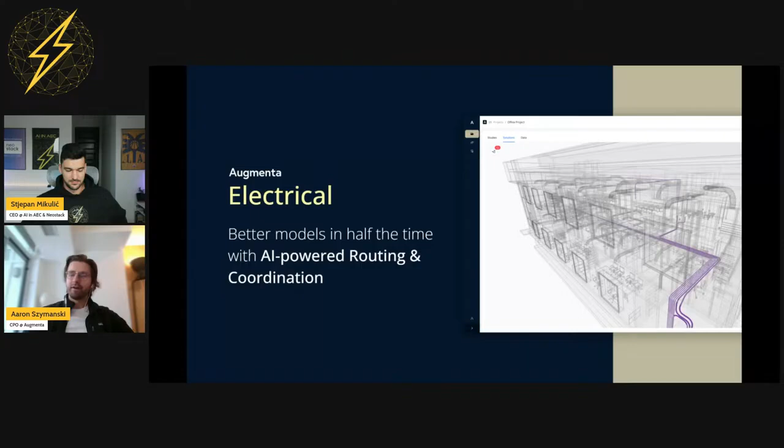All right. So what I'm going to do here is walk everyone through a high-level introduction. I know the goal of these sessions is the demo, so we will focus on the demo. So I'll treat this more as a table of contents. We'll talk about what we'll show you, but we'll go through all that live, and you guys can hop in with any questions you have at any point.

But where we are today as Augmenta, we are focused on electrical. As I suggested previously, our ambition is to automate the design of entire buildings. That is what we're working towards. But right now, we've started off with electrical. Number of reasons for that, but fundamentally our goal today is to help electrical contractors and electrical engineers dramatically accelerate their modeling and coordination process through the use of an AI-driven design system.

So a bit about myself, I'm Aaron Szymanski. I'm the Chief Product Officer and one of the co-founders at Augmenta. We build these systems that automate the design of the core engineered systems. We really care about the things behind the drywall that drive the cost and complexity of construction projects. So your mechanical, electrical, plumbing systems, your structural systems. This is really the hard part of the building design process.

So where we are today is we've got this product that automates the routing, modeling, and coordination of electrical raceway, with a focus on conduit. Most of our users today are electrical contractors, primarily in the United States, and they're using us to get from 0 to 1 very quickly. You've just kicked off a project, you've got your Revit model, there's nothing in there, and you need to get to that first coordination meeting next Friday, and you need that model populated very quickly.

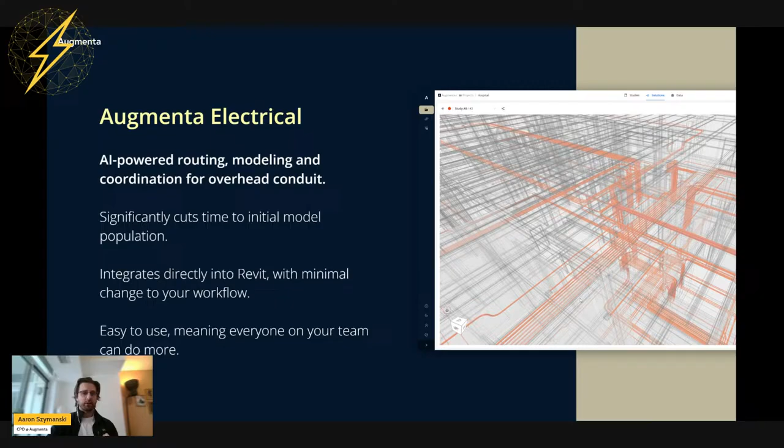Fundamentally, the value is that you can do that in way less time than it would take to do it manually. And that unlocks other benefits as well that we can talk about. So I won't spend a whole lot of time on this because I'll just hop right into a demo.

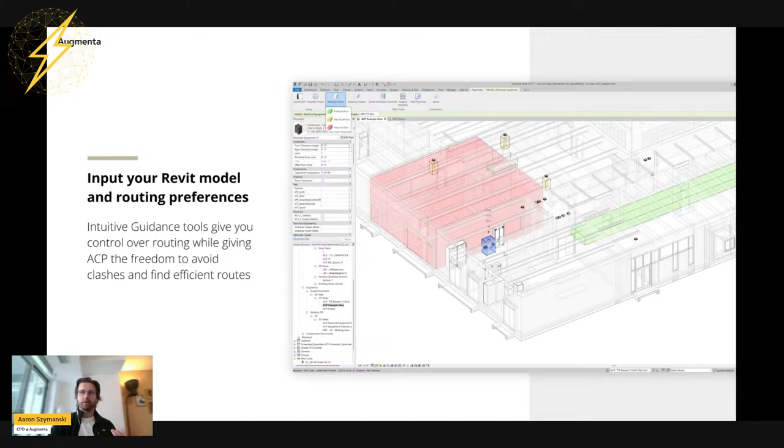But again, just think of this as sort of like a table of contents of the demo. Fundamentally, the way it works is that you define your problem. So you give it a Revit model, you give it your sources and destinations in that model. You can provide your preferences or the context you have around where you can or can't route in that model.

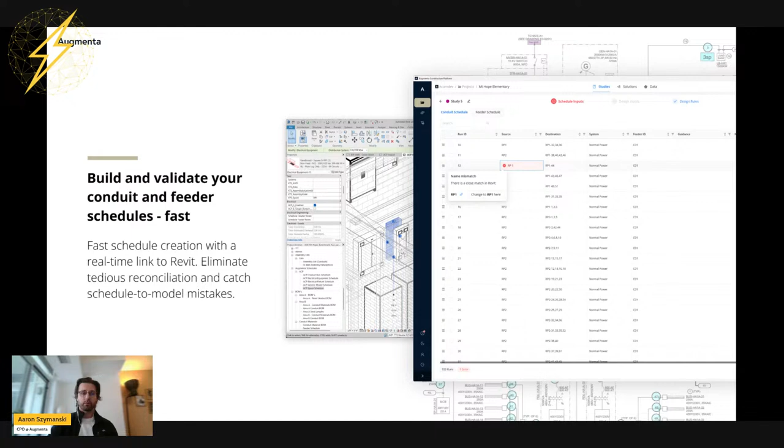You provide a description, a conduit run schedule that describes the runs that you want, or the equipment that you want to connect to your to and froms in a given project. You can specify additional design rules like your elevations, your supporting methods, your clearances. And once you've set all that stuff up, you hit generate and you're kicking off a generation process.

And because you won't really see what's happening behind the scenes in the demo, I do want to spend a little bit more time on this. Fundamentally, what is happening is that our system, which operates in the cloud, is extracting site geometry, the information that it needs about your site, and it's performing a spatial analysis on that site. Essentially, we're trying to look at your site the way a foreman would look at it, where our goal is to produce solutions that are not just generically routed, but are actually constructible.

So we perform a supportability analysis based on the types of supporting methods you specify. So that can be a floor stand, trapeze, wall standoff, and so on. It's going to look at the site, identify the spaces that can be supported with those methods. So for example, it's going to prioritize areas with open slab above over, let's say, directly underneath a duct where there would be some obstacles to get that threaded rod around and get that thing supported.

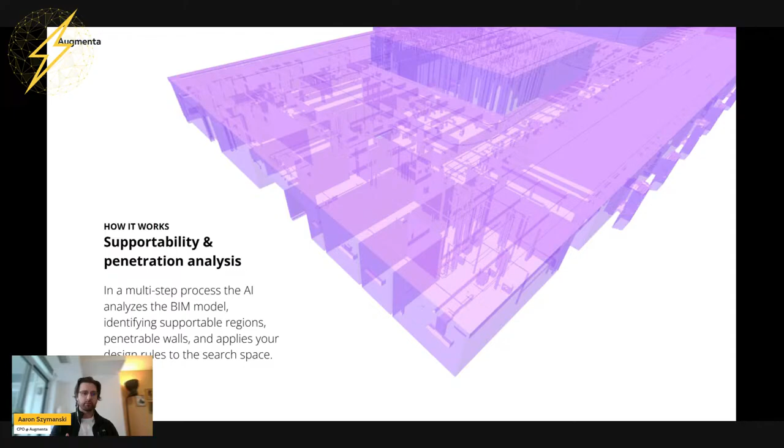We're looking at the penetrability of walls. We have an understanding of the cost of penetrations based on the type of the wall, the amount of conduit that's going to be running through that wall, and so on. So there's a number of different analyses that the system runs. And then within that understanding of the site, it generates a number of designs. It really is single shot, full building routing and coordination. By coordination, I mean it's producing clash-free designs in a single shot.

And it's really solving a number of problems here. It's obviously finding the optimal pathways for every single source and destination, so every run that you need to run in that project. It's figuring out optimal racking strategies. So how do I group these together to minimize the amount and the cost of the supports in a given project? How do I minimize the bends to reduce the difficulty of installation, to reduce my total degree of bend?

It's figuring out the optimal layout within that rack. So how many tiers should it be? It will vary that based on external factors like the space that's available. And again, it's trying to reduce the cost of the supports that would be used on a given design. It's figuring out where to peel off and so on. So it really is solving a number of different levels of problems that BIM and VDC teams have to solve every single day. And that's ultimately what makes this so hard to do for those teams.

Once you've done that, you can review the designs. You can review them in 3D, but you can also review the analysis of those designs, so you can learn something about the performance of these different designs. For example, I can look at any one of these solutions. Here we've got a 3D view, we've got a plot chart, and I can look at the estimated cost, the estimated time to install, the amount of material, the degree of bend. And where this is really useful is that, in just a couple hours, I've just routed an entire hospital floor.

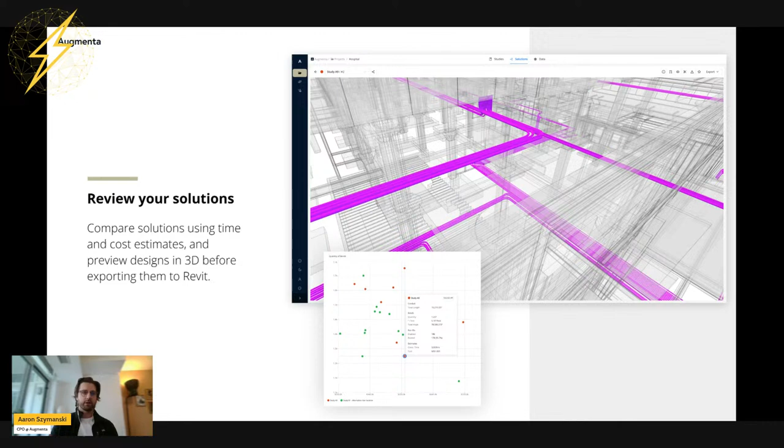So if I'm an electrical engineer, or I'm working on a design build contract, or I'm approaching a value engineering problem, now I can go and compare what would happen if I ran this with aluminum versus copper feeders. There's a size difference in those. There's a cost difference in those. I can just run both in parallel, and now I can get very informed feedback on what is the optimal design for a given project. This is particularly useful for folks working at the earlier stages of the design process.

Once you're happy with the design, you can push it back into Revit, where we've got additional tools for QA and QC to really help you make sense of that design, because you've really just gone from 0 to 1, right? So you started with an empty model. Now you've got hundreds of runs populated. We need to help you make sense of those designs so you know what you're looking at and can verify that everything's routed the way that you want to.

But there's another reason we need this tooling, that is that our designs are not perfect, right? We're very much in the early days of really applying ML to the creation of designs in a complex 3D context. It's much easier to apply to 2D, if we're producing sort of high-level sketches or high-level routes over a floor plan. That's much more of a solved problem than it is in 3D.

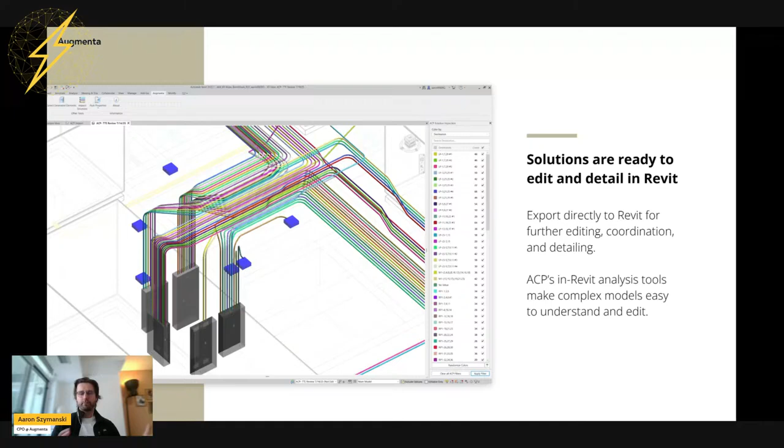And so the result is that today, there are going to be things that you have to fix. There's going to be some soft collisions, extra bends, and so on. I'll show some of those in the demo just to help you characterize those and get a sense of what that looks like in practice.

But ultimately, the way we measure whether this is helping our customers or not is by comparing the time it takes for you to set up. So let's say, create that schedule, get the Revit model set up, the time it takes to generate, which, because it happens in the cloud, is sort of passive time. You can go work on other things while that's happening.

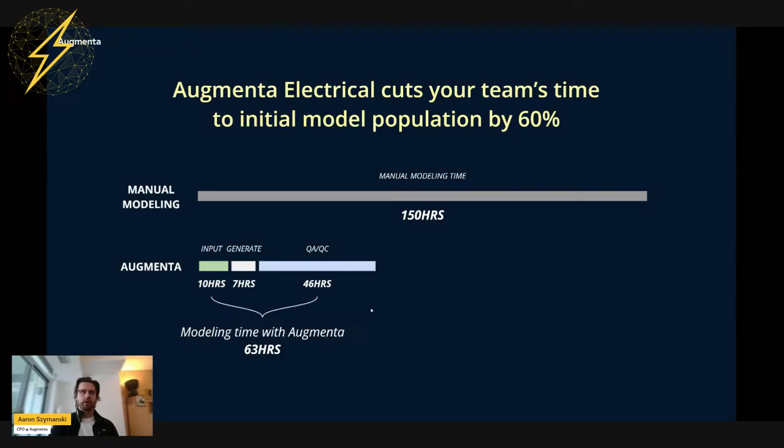And then the time for you to do that review, to make edits, whether because you're seeing issues from a solution quality perspective, or you just simply want to approach that design in a different way because of something you've learned during coordination. So we include all of that. And generally what we're seeing is that teams using this tool are cutting their time by about 60% or so. And that rate of time savings has increased in a very linear fashion over the last several years.

So again, it's like any other ML tool. We're making significant advancements in the performance of the system over time. Our solutions are getting better and better. There's less and less editing required. The setup gets faster and easier, and so on. So even what I'm going to show you today is really just a snapshot.

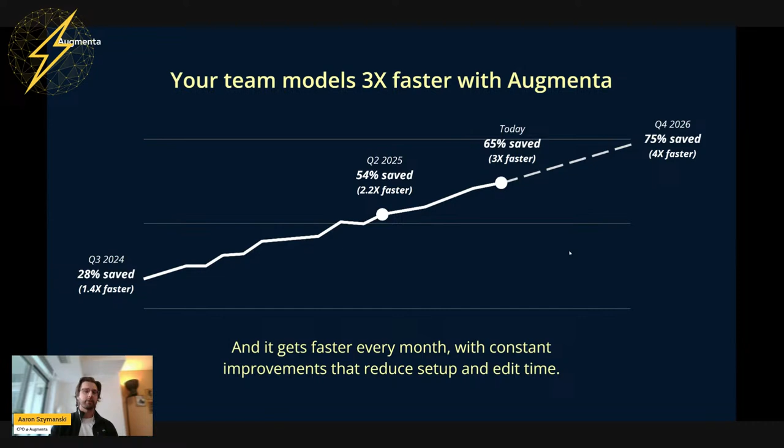If we were to give you this demo even a few months ago, it would be 50% reduction in time. Today it's around 65%, and that's continuing to increase. So we're really targeting to get folks to about a 75% reduction, so about 4x faster by the end of this year, and we're definitely on track to do that.

So just some examples of what that looks like on some more complex projects. This is a hospital. I've hidden all the background geometry, but this was against fully detailed and coordinated mechanical and plumbing backgrounds. Same for a science lab, so very similar level of complexity, but on average, we're able to about cut that in half down to about a third.

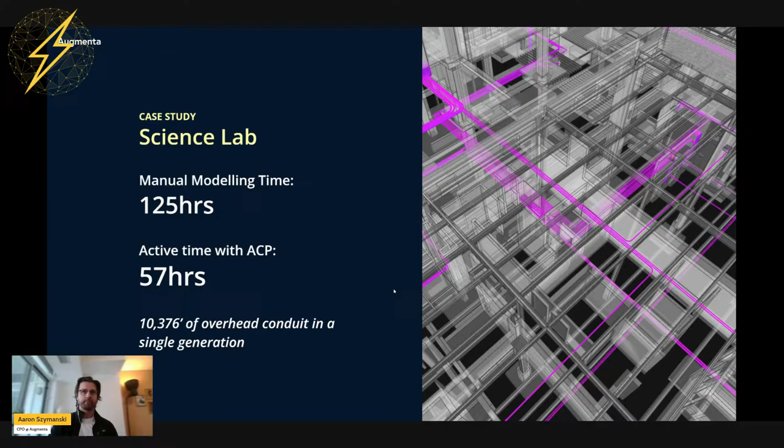So what we're talking about today is electrical, but our goal is to do this not just for electrical, but for mechanical and plumbing as well. And it's not simply about copying the workflow I'm going to demo over to those trades, but it's about being able to simultaneously coordinate those systems in a single shot. So imagine everyone setting their own requirements, their own schedules, their own preferences around where things route, and you hit a button and you're generating a fully coordinated MEP system in a single shot.

Really what we're trying to do is we want to eliminate the coordination meeting. It's going to take us a little bit of time to get there. Obviously, it's a very complex problem to solve, but like I alluded to before, this is very much a solvable problem. And that's really why we built this company, because once we can start to do that, that's when we can really start to take weeks or months off of construction schedules.

Whereas with electrical today, we're helping the electrical contractor a lot. There's certain types of projects, like a data center, where electrical is the critical path. But for us to really bring this benefit to the whole industry, we need to at least be hitting these MEP systems simultaneously, and that's what we're working towards as well.

Let's see. And then we got a question. Can you plan to penetrate steel beams along the neutral axis where the above ceiling space is limited? So you can, and I'll touch on that in a little bit in the demo. By default, the system will not penetrate steel beams unless you give it explicit permission to do so.

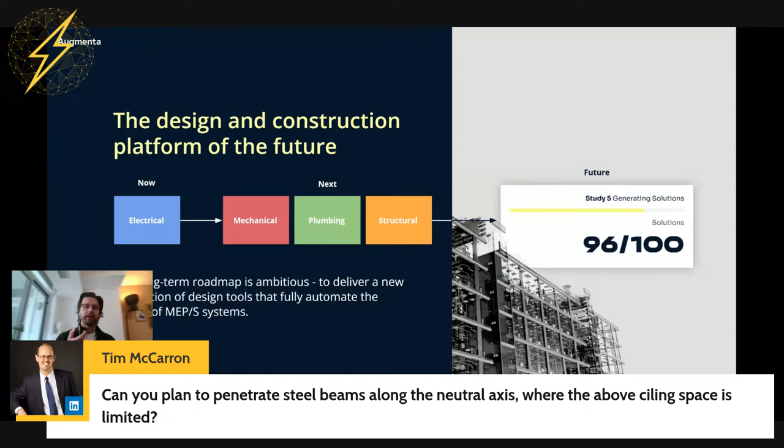The exception would be walls and floors and things like that, where you can set more general rules allowing for penetration. But anything in the structural categories or the mechanical and plumbing categories, it really is up to you to make that explicit indication of where you can and can't penetrate. All right. So that's sort of a high-level overview. Would love to hear any more questions. Otherwise, we can hop into a demo.

Yeah, this was awesome. Thank you for presenting it so well. So now it makes sense how you got started with electrical. I was about to ask you, is it only residential that you're covering? But you showed healthcare, you showed data centers. Are there any limits to what this can do? Is there any building shape that Augmenta can't work with?

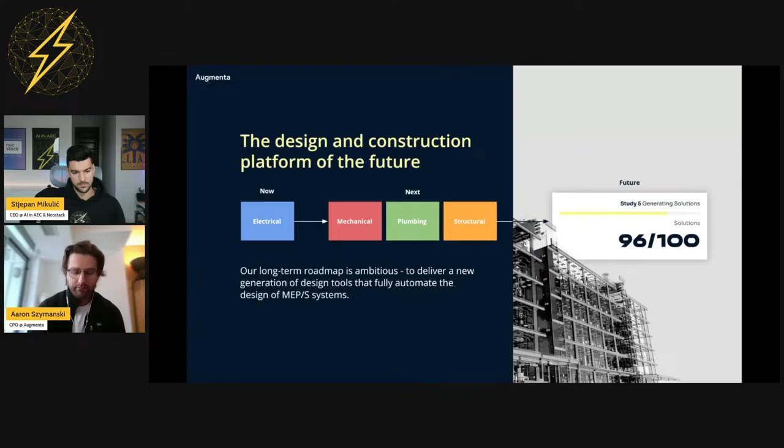We are not currently limited to any building typology. We perform best actually on more complex projects. So we've run multiple data centers, multiple hospitals. We actually have not run, I don't think, any residential projects. I think we actually have one going on now that's a condo building. But we find the biggest application of this is in those more complex projects, because those are the ones that need it, right?

If you really have hundreds of runs that need to be woven through these very tight spaces. Basically what we find is that in that initial setup period of setting up ACP, there's a linear increase in setup time, but a far more aggressive rate of time savings. So on a very small, simple project, like a 10-room clinic, that's a threshold where, given the time it would take to set this up, you might just want to model that yourself. We might save you some time, but you're not going to get that enormous time savings.

Whereas on a data center or a hospital, this is weeks of manual modeling and coordination. That's where you see those really significant time savings. So I would say that our most common project types are data centers. We've got multiple running right now. Hospitals, we've seen a lot of hospitals. That seems to have quieted down a little bit in the last quarter, being taken over by data centers. We've had several manufacturing facilities.

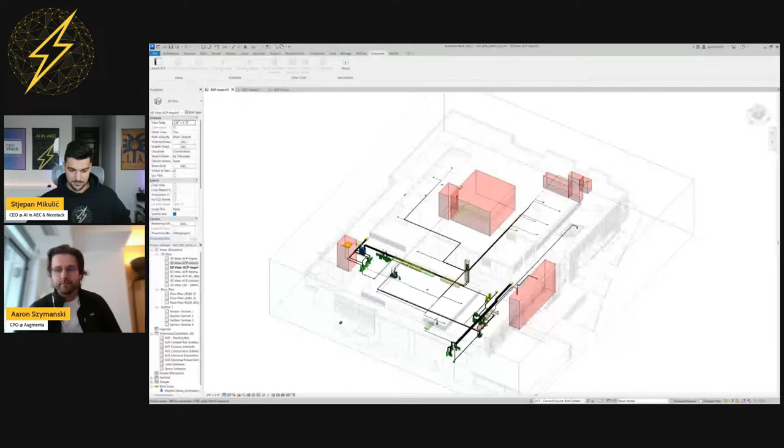All right, great. So there is great demand for that. Yes, we do have plans to move into the European market with greater support for cable tray.

So let's kick off. What we're looking at here is Revit. We all know that. And what I'm going to show you is how you would use ACP to produce what we have on the screen here. So this is a large commercial warehouse / office type building. This is a real project. I won't zoom in too much on the building details, but I will zoom in on the conduit details.

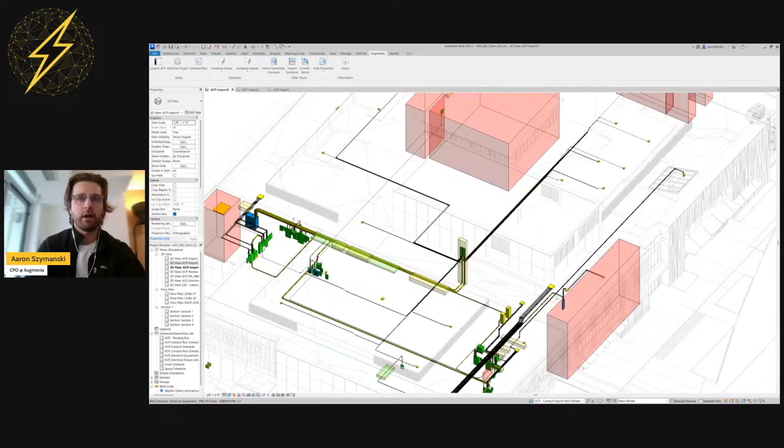So everything we're seeing here, think about how long it would take you and your team to model and coordinate this manually. I won't feed you an answer, but when we ask different customers this, they'll say something in the order of 1 to 2 weeks. And this was entirely generated single shot within ACP in about 40 minutes. There was some setup time to build out the schedule, but the actual generation process was extremely fast. And the output is something that we bring into Revit, and we can zoom in here.

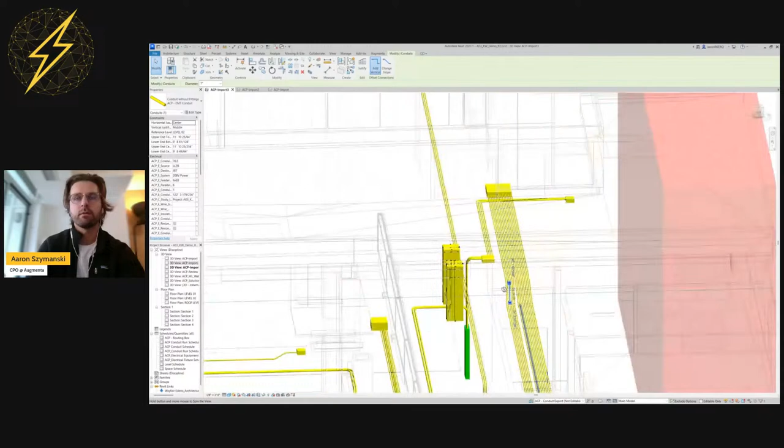You can see that we're connecting to all the equipment. We're laying out those racks. We're coordinating around different obstacles. I'll spend more time looking at the solutions in a little bit, and we'll look at it in ACP. But I just kind of want to start at the end here to show you what type of output is possible. And honestly, by our standards, this is a very simple project.

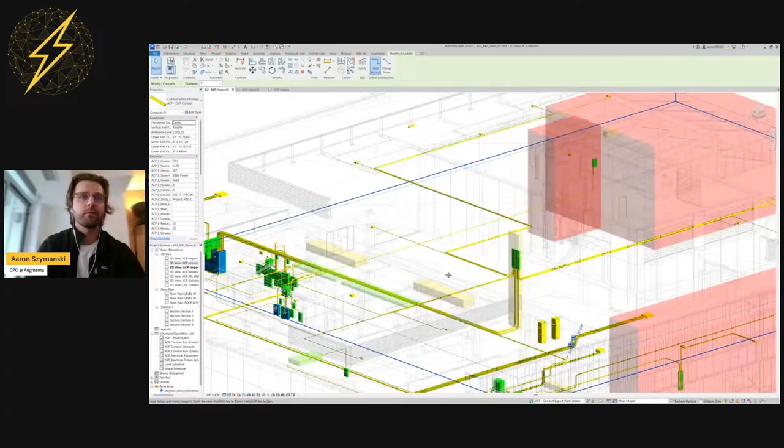So something that you can generate in 30 to 40 minutes is, at this point, fairly easy for us to handle. We're running data centers that can take up to 12 hours to generate. So you're running them overnight. We've run 18 miles of conduit in a single shot overnight in a single generation. So we ran all the feeders and almost all branch for our entire data center in a single shot. So we've managed, especially over the last year, to make a lot of progress in terms of the scale of site that we can handle.

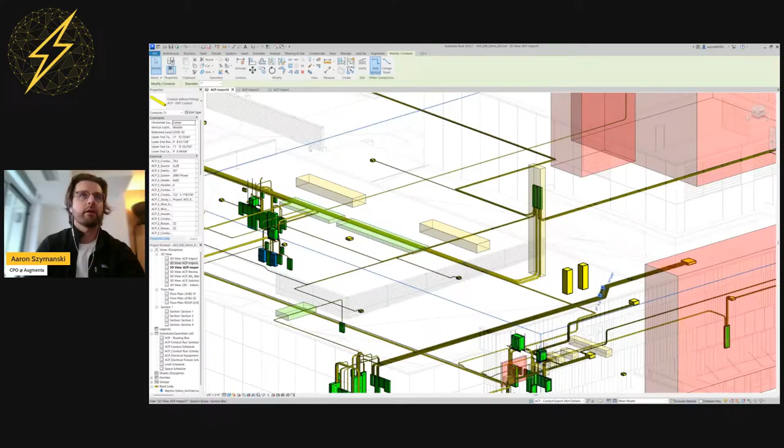But so how do we get here? Well, let's start off with the setup that happens inside Revit. Okay. So what I'll do is I'm going to hop over to the ACP import view. So basically, we've got a special view inside Revit that controls what ACP sees. So by default, ACP, that's the Augmenta Construction Platform, is going to route around, like I mentioned before, solid geometry. Of course, it has special handling for things like walls and certain elements, but generally speaking, it's going to coordinate around anything you want it to coordinate around, and you control that by controlling the visibility of those categories or elements in this view.

So I've got my building open. I've maybe filtered out the things I want or don't want it to care about, but really the most important starting point is that I've got my equipment. So Augmenta does not place equipment for you. This is something that you've placed. It's either coming from the engineer model or it's something that you've placed yourself. And every piece of equipment here, if I open up, let's say, a panel, it's got some kind of a unique identifier. Where is that? Panel name, DH2A, right?

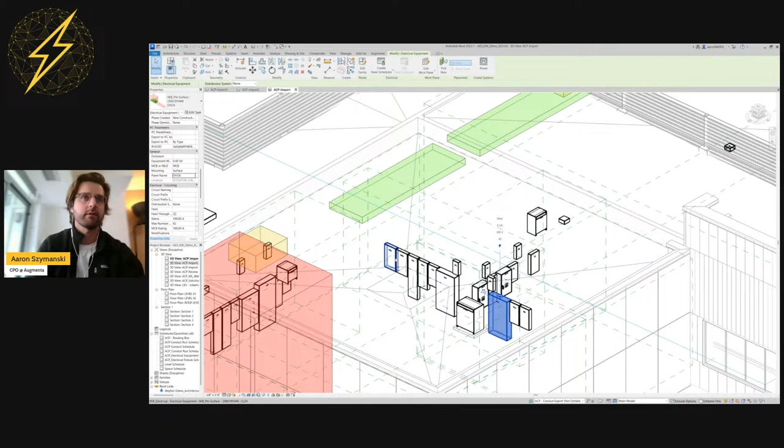So not saying anything particularly revolutionary here. Every piece of equipment, so that's my sources, my destinations, is going to have some kind of a unique name. And I'll show you how we're going to use that in a little bit. So the very first thing we have to do on this project is define our to and froms. So I have gone and I've placed all my equipment. I've placed my junction boxes, my home run boxes. So all the sources and destinations have been placed. I'm going to launch ACP. I actually had it running back here.

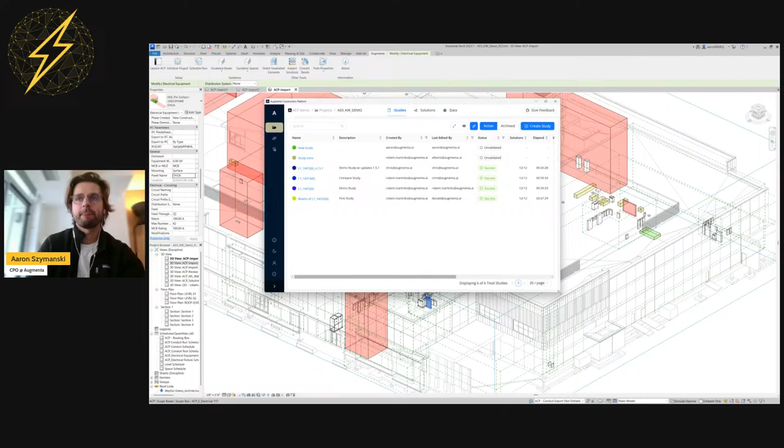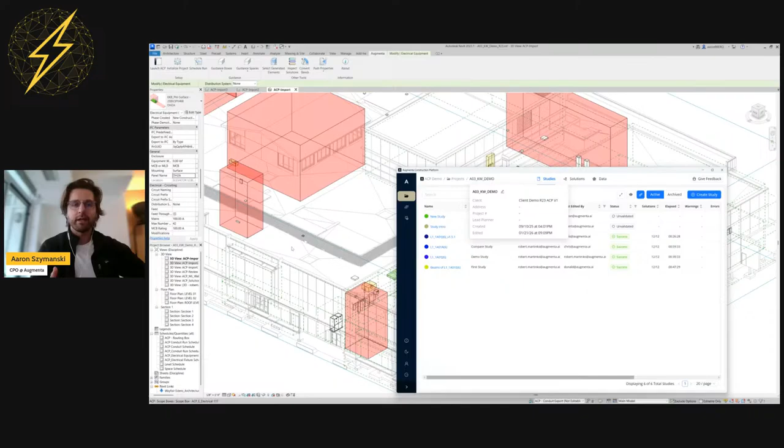Okay. And while we're here, we're looking at ACP. So ACP itself runs in a web view that's embedded inside Revit. So we have this plugin here, and really the goal of this plugin is to read data out of Revit and then later to push a solution back in. We've got some tools here that I'll talk about in a little bit that really help you mark up this model, help you provide some of those preferences, and you can kind of see hints of those colored boxes back here. That's me providing information around where I can, can't, or would prefer that you route. We've got other tools for doing our QA/QC after that I'll talk about.

But really the brains of the system is running in the cloud, and it's accessed through this web app. So right now this is our demo environment, but this would be your company's personal environment. We're inside our projects, and we're looking at this demo project here. And what we see here is a list of studies. So studies are really the key organizing concept inside ACP. And a study is basically a what-if scenario. It's basically saying, with this particular setup of the site, if I were to use this conduit schedule, this site, and hit generate, what type of solutions am I going to get out of that?

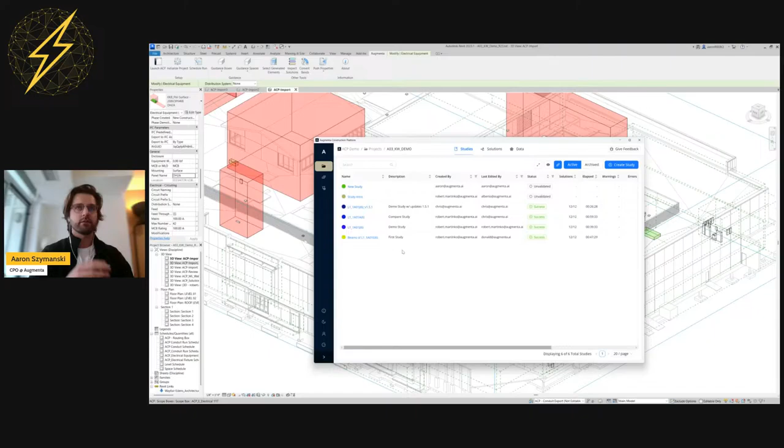So earlier when I talked about doing, for example, copper versus aluminum feeders, or as changes are happening to that project, I can create these new studies, I can generate against them, I can run multiple studies in parallel, and then I can go and actually compare them with each other. I can compare the stats, but I can also overlay them over each other so I can see what is the routing or the space impact of one sort of design decision over another.

So if I create a new study, I just hit create new study. I have sort of a blank one here. And opening this up, the first thing we see is the conduit schedule and feeder schedule. So that's going to answer, Sanjay, your question. This is really one of our primary inputs here.

And what's cool is that I can build out this conduit schedule, which for those maybe less familiar, actually I'll create one and then we can talk about what's in it. So a conduit schedule defines the conduit runs I want to run between a given source and destination. So each one has a source, and I can go in here, and it's actually live linked to Revit. So it's pulling in all of the names that it can find in Revit.

So I'll just pick one randomly here. It's got a destination. I'll pick another one randomly. It's got a system, and systems for us are something that we can later use to target design rules to. And then it's got a feeder ID. And a feeder ID is basically just a reference to a separate schedule, which right now is empty. I'll load one in. That defines the number and the quantity and the size of the parallel run.

So I'm basically saying from ATS2 to CL1B, that belongs to a power system, and I want to run two 2-inch conduits between that. So if I went to the feeder schedule, I can go and build out a new row. I just got to give it an ID. I can say one parallel run, and I can pick a size, and then I can go and reference that here, right? And now I've got this run.

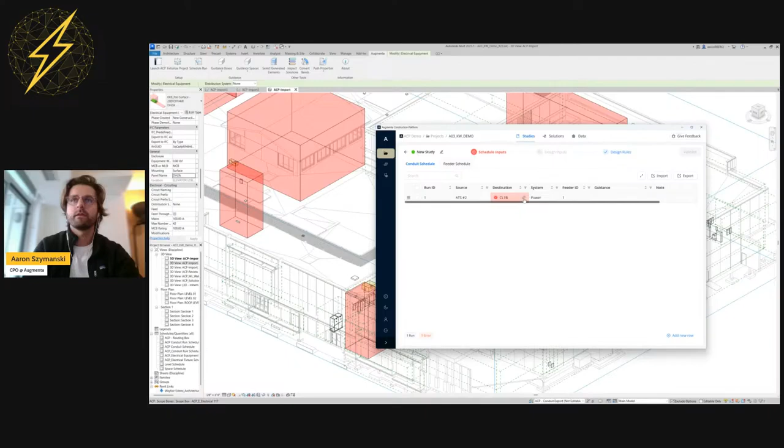All right. So the other thing is, like you just saw, when I load these names in, these are actually live linked to Revit, right? So this ATS number 2, if I click the link button, I can go and actually find that element in Revit. And the reason this is important is that if I change the name of a panel in Revit, that conduit schedule is going to automatically detect that change. It's going to flag that something has changed here. It's going to suggest that there's something with a similar name.

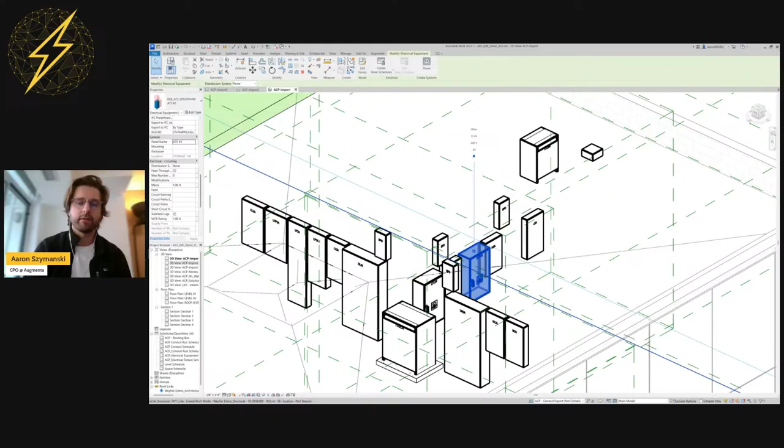So if I went here and let's say I just did ATS2, it's going to say, hey, we couldn't find an ATS2. There's something very close though. Let's go look at what that is. ATS number 2, right? That's what I meant for that to be. I'm going to go ahead and change that here. So this is basically a real-time verification system that makes sure that my schedule is always completely accurate against the model that I have. And this is really important.

If I've got 40 runs, maybe that's something I can manage myself and keep in my head. But again, these complex projects can have hundreds of runs. We all know that things are changing in the background. And also people make mistakes. They make these little changes. Maybe I wrote ATS2 in my Excel-based conduit schedule, but it's ATS #2 in the model, and that's a link that's now broken, right? There's now a mismatch between that data. So we've put a lot of work into building this experience where we have this real-time two-way link between the schedule and the model.

But let's go ahead and clear this out and put in some real data so we can go ahead with the rest of the demo. All right. So the other way we can build out these schedules is, most of the time, you probably have a schedule to start with. Maybe you built it out during estimation. Maybe your planning team has built it out. So we support the import of CSV or Excel formats.

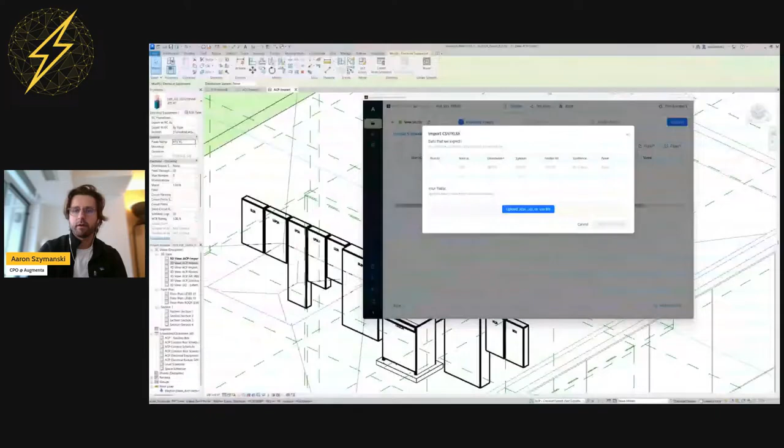So I've got, for example, a schedule here. Let me pull that up, that maybe I pre-built here. It's got a different format than the ACP one, but that's totally fine because we've got this tool here to map those together. So I'll go here and I'll load that in. And basically, I just need to map up. So source, that's my from; destination, that's my to column; system is my system column; feeder, perfect match.

We have this guidance column that I'll talk about in a second, but I don't really have an equivalent guidance column in my conduit schedule that I built in Excel. So I'm going to skip that, and I can just go ahead and import that schedule. So first thing you see is that there's a bunch of errors found here, and that's because we haven't loaded in a feeder schedule. So let's just get that loaded in as well.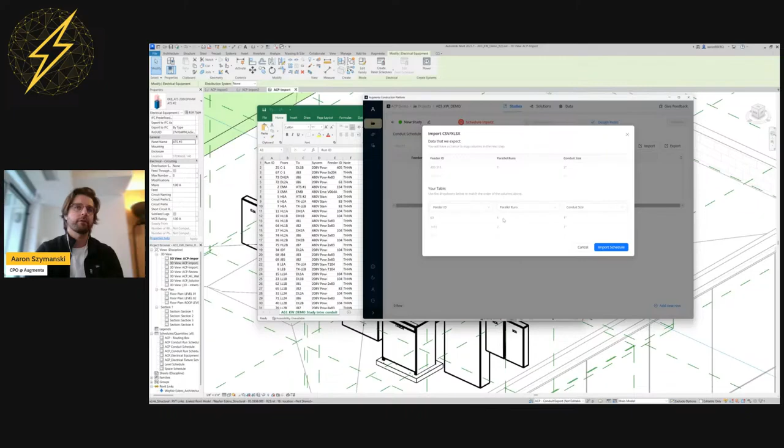And a lot of the time we see that folks are using other systems. They've got an estimation or a PLD workflow that's creating these schedules. Maybe they're exporting them out of Bluebeam, maybe they're creating them in Evolve. So we really don't care where that schedule comes from. We've designed this workflow to work with your process, the data that you already have.

We really try to impose as few process changes as possible. And what this allows you to do, of course, is to work with that. So we've got this mapping workflow that should take in any schedule format you might have. We've loaded in the schedule, and we see an example of what I was talking about before, where we've got this mismatch. Here, someone typed in Excel C-1, but in Revit, it's actually called C1.

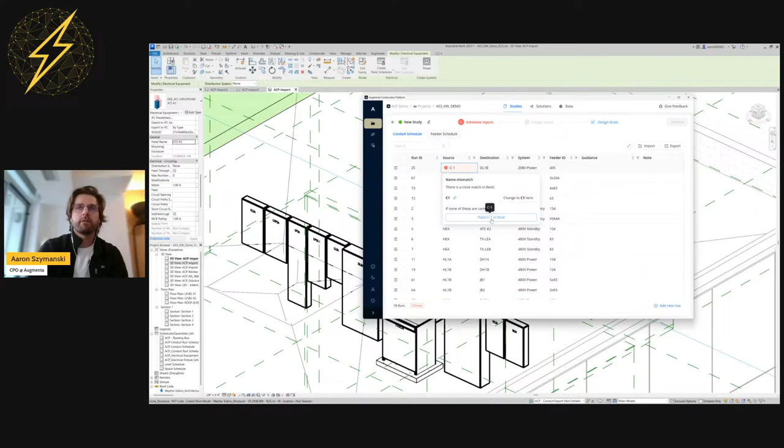We can go and verify that. We can change it. But we might actually say, no, we want the schedule to be the source of truth. There is supposed to be a C-1 that's different than C1. So the other thing we can do is place it in Revit. This is going to open up this other tool where I can go and place devices off of my schedule.

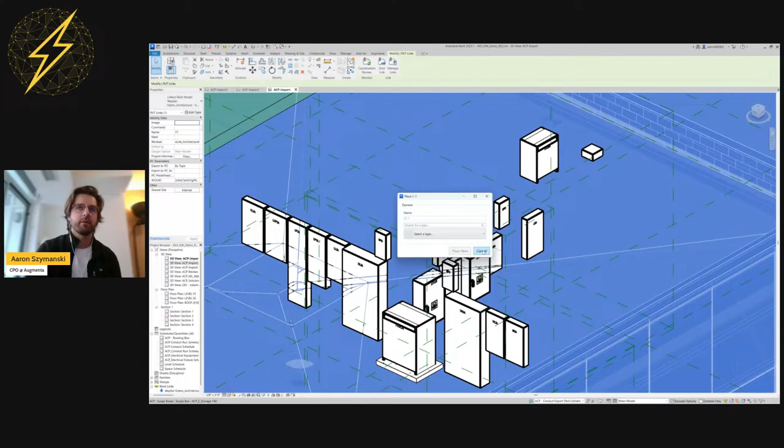Where this is really cool is a workflow where you've got a planning process, your PLD team, this is a little bit more contractor specific. They've planned out their home run boxes. You've got those in a schedule. They're not in the model. I can go and systematically get all that content placed and make sure that I've got a perfect matchup with that model. But for now, we'll just change it here. We'll do that with this one too. Okay, so we've got our schedule all set up here.

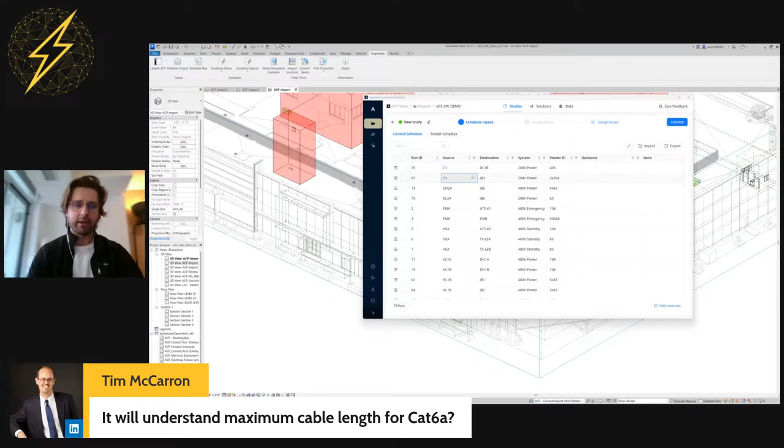Next thing we need to do, and let me just answer a couple of questions that have come up. Tim, you've got a couple here. Will it understand maximum cable length for Cat6a? No, not right now. We don't impose any hard limits based on cable length. We run a global optimization process that is trying to reduce overall length. We are building some analysis tooling that's going to help you identify where you might hit those limits. But really the system is working more towards goals. It doesn't have hard limits around something like angle or length. It's always trying to minimize those as much as it can.

Does it have a level of development that will reduce the model size? I'm going to assume you mean on the export side. There's the level of development on the import side, as in what LOD is this background model. ACP doesn't really care. It just needs the basic geometry. It needs to know where the walls and the floor are. That's technically all that you need. And you just need equipment in there.

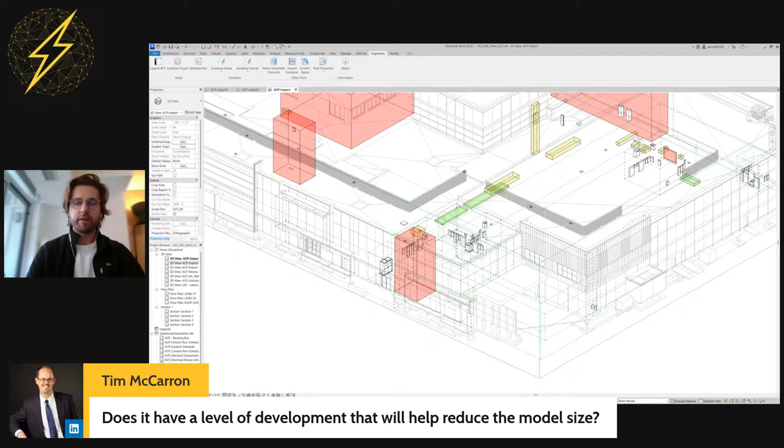On the export side, today we export our designs just using generic Revit system conduit. I'll show you an example of what that looks like. We're not currently placing couplings and supports and things like that. So that's probably the lowest level of development that you'd be interested in working at. And from there, we're trying to make our output as agnostic as possible so that folks can use their existing modeling tools. So if you are using Evolve, we make it very easy to flip over to a tool like that so you can go and detail it yourself.

And would the contractor use the model to do coordination drawings where changes happen during construction? That's a really good question. I would say it depends on how big that change is. A lot of our contractor customers are using this to do that initial population, right? And particularly, we know this is sort of unique to electrical.

They're kind of having to catch up the most compared to the mechanical and plumbing trades, who generally have more to start with. So the electrical contractor, they're getting started. They're often starting with nothing modeled, and they need to get this populated very, very quickly. And I would say that most of the value for them is that: it's getting that initial model populated.

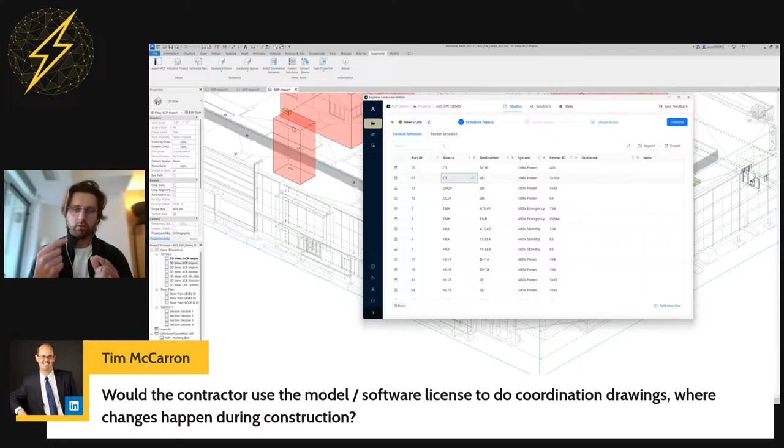From that point on, as the subsequent coordination process occurs, there are going to be changes. If those changes are localized, like I just need to shift something from the left side to the right side of the hallway, we would suggest that you just do that manually. Right now, it really is more of a whole building design tool rather than sort of a localized editor, if that makes sense.

But we have had projects where there were big coordination changes. Like, turns out we can't run down the south side of this at all. We actually have to reroute entirely to the north, where it's effectively a redo. And for that, it's perfect, right? Because again, you can take something that would have taken weeks to do, and now I can flip to this radically different set of pathways very, very quickly.

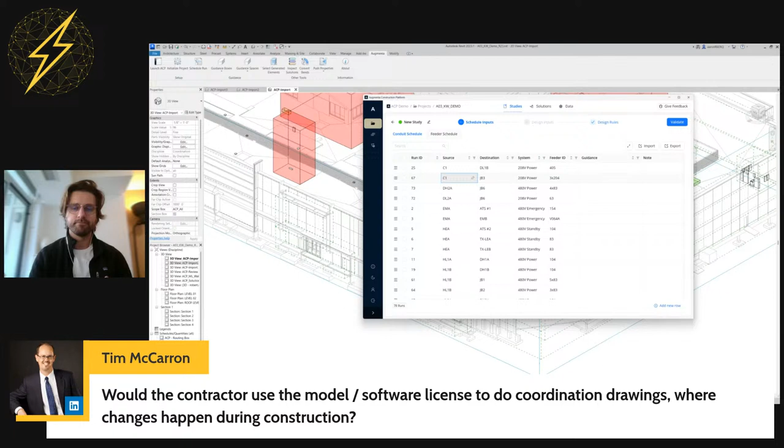So yeah, I guess to answer your question, it really depends on the severity. But really the big way to think of this is it's a global optimization process. It is a little bit more sort of whole building, one shot. So you want to be using it where it makes sense to do so. But yeah, very good questions.

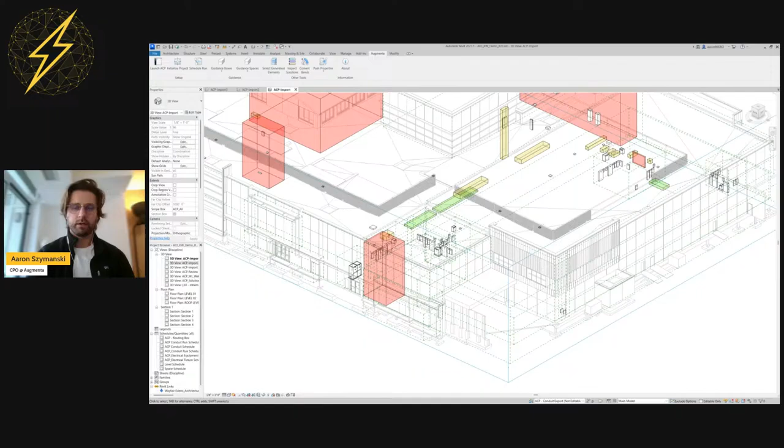All right, so we've got our schedule built out. So now ACP knows what connects to what and what it needs to run between them. The next thing I want to do is give it a little bit more context around where I can or can't route in a project. Using the Evolve, Hari, I'll answer that question in a second. But we don't have that issue, is the short answer.

So the way I do this is, okay, I've got this project. There's things that I know about it that I need to tell ACP, right? So ACP generally works with a fair bit of design freedom. I could take what I've shown you so far, equipment, conduit schedule, and just hit go, and it's going to route that entire building already with no additional guidance. But quite often I have some idea in mind of where I want things to go, and we can specify that with these guidance tools. We've got two types, but they kind of work the same.

We've got guidance boxes. The first is a preferred routing box, where this is basically a way for me to specify my preference, right? It's effectively, I'm sketching out a magnet that draws the routes to that pathway. I'm sketching out may route boxes. Those are the ways I would indicate those penetrations. So again, I want to indicate where I can penetrate through the beam, and so on.

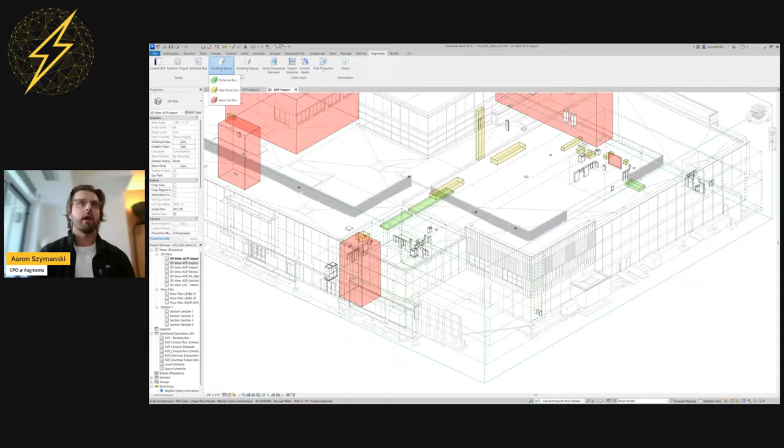Or sorry, the keep out boxes are sort of the inverse of that, right? So a keep out is a way for me to specify where I don't want you to go. So keep out is a way for me to say, look, in this mechanical room, you cannot run any racks through here, but you're still allowed to hit equipment inside that space. And a guidance space is basically the same behaviors, except I can apply them to spaces instead of drawing these boxes manually. But that's really what we see here, right?

So we've got keep outs. Maybe we blocked out some shafts or some areas that we don't want any racks running through. We have different routing boxes. So we've got a combination of may route and force route boxes, which are those preferred routing boxes. And this is a way for me to provide this high level guidance to the system.

Related to that is, if I want to get really precise, I can actually go and assign some of these runs to those preferred routing boxes. And what this will do is force that run to pass through that box. So I can set up these boxes essentially as waypoints for those runs to pass through. Okay.

So now I've gone and specified my to and froms, where I want things to go, where I don't want things to go. And really at this point, the next step is just to get that data up into ACP. So I won't show this live just because it takes a couple of minutes, but this is really kind of the only syncing that happens, to answer Hari's question, where I would need to upload the geometry from that site over to Augmenta. This process generally takes a couple minutes, but it is one shot.

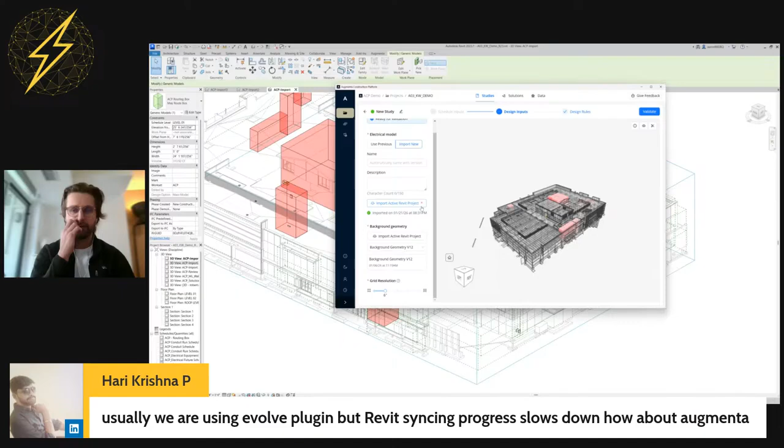Once you actually hit that generate button and you start generating the solutions, it is running in the background, it's running in the cloud, so it's not affecting Revit whatsoever. So generally, this is something where you'll set it up in the morning, you hit generate, it's going to run in the cloud. We're not touching Revit at that point. You can go and continue working after that. At the end, you're just pushing a solution back into Revit. That export process takes a couple minutes, but there's no background syncing that happens.

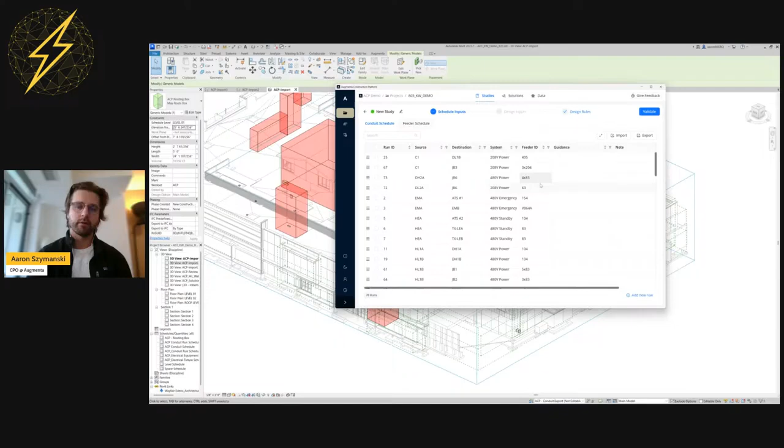There is that sort of syncing or live connection that happens in the conduit schedule, but it's extremely light. We've put a lot of work into optimizing it, so we've never seen or heard about our customers having any kind of performance issues as a result of that running. And again, it's only running when you have that view open as well. So we're not live updating data in your model as you're working through it. So in this tab here, I've uploaded the electrical model and the background geometry.

And then the last pane here is my design rules. I won't go through all of them; I'll touch on some at a higher level than others. The first is supports. Essentially, even though we're not yet placing the supports themselves, we are very much considering the types of supporting methods that you specify when we're generating these routes. So in a separate part of the application, I can set up my support specifications. It's literally just a prioritized list of trapeze, floor stand, wall standoff, and so on. Again, I can scope that down to different parts of the site.

So I can say I've got, let's say, a manufacturing facility. In this area floor stands are acceptable. Everywhere else is just overhead trapeze in all the office areas. We have different clearances from different elements, so we can specify clearances from walls, railings, and things like that. We have our conduit spacing, so this is edge to edge spacing, horizontally and vertically.

And then we have our elevations. This is probably one of the most important types of rules that you're going to set. So we have a lower clearance: what's the minimum height that this can run at? What's the maximum height that this can run at? That's my upper clearance. And then within that range, which might still be fairly big, what's my preferred height? So we can set this preferred elevation in that allowable range. ACP can still enter and exit this range, of course, to actually connect to equipment.

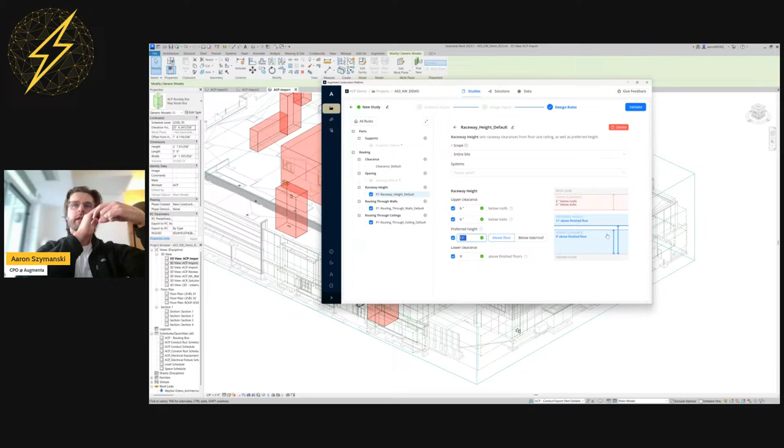But generally, I want to run above the ceiling. This is the allowable range above the ceiling, and I want to try and stay below duct. So my preferred height is below where the duct gets run. Within that, we are working on a very similar concept to that preferred routing box. It's basically a magnet, so the system will try to run at that height. It can still deviate where it needs to: say I've got a clean shot here at 11 feet above finished floor and there's something in the way, I can offset down around it and then get back up to that elevation.

Other than that, we've got some general rules around routing through walls. This just gives us permission to route through walls. We identify which walls are interior and exterior so that we're not punching in and exiting the outside of the building. And then same for routing through ceilings. Generally, you want to leave this on because you want to be able to drop down and hit equipment if it happens to be placed below a ceiling.

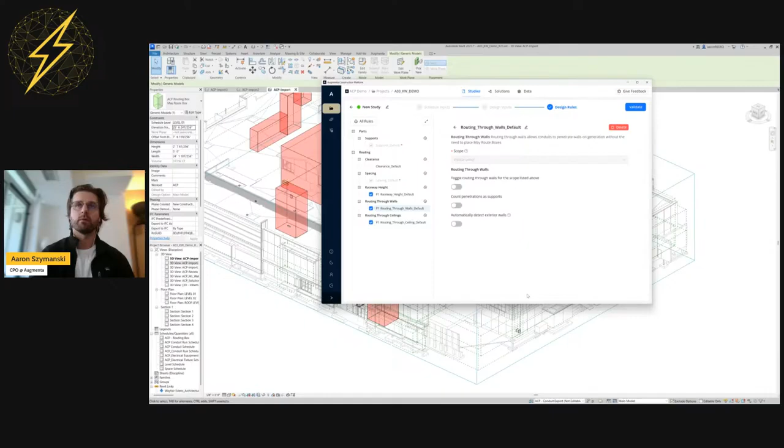All right. So at this point, and I will pause to answer questions in just a second, this is the setup. This is everything that I need to do to define a problem for this system to go and solve. At this point, I would just hit validate, generate, and it will kick off that generation process. As it does so, like I mentioned before, it's just running in the cloud. It's not affecting my Revit instance, and I'm free to work on other things. All right. So let's see, questions. Okay, so Hari, I think I touched on your question.

Marie: looks super useful regardless of how it works, but seems more like a mathematical optimization than AI. If not, what is the AI part? So it's a really good question. Underneath the hood, we're using a combination of more, let's say, traditional mathematical optimization and true data-driven machine learning. So this is not an entirely data-driven machine learning system.

The reason for that is that, particularly within the 3D context, we are not able today with present-day technologies to arrive at the level of accuracy that is sufficient, particularly for contractor applications, where they need something they can bring into actual coordination meetings and get actual design sign-off on. So we knew that going in. So our system is a hybrid.

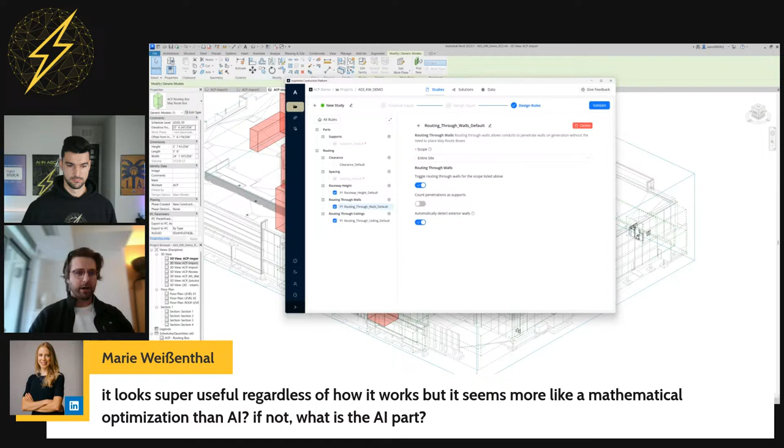I won't quite go into the details of where we use different things, but essentially we've got a solution generation pipeline. Some parts of that pipeline are driven by machine learning. You can think of this as a higher-order coordinator that identifies the high-level strategy for routing, whereas the actual details of how that route is executed are done using more traditional mathematical optimization and computational geometry approaches, so that we can get to the consistency and accuracy that we need for this application.

Okay, and then Tim: areas below rainwater leaders for the roof drainage. Tim, I think I might need a bit more context on that question.

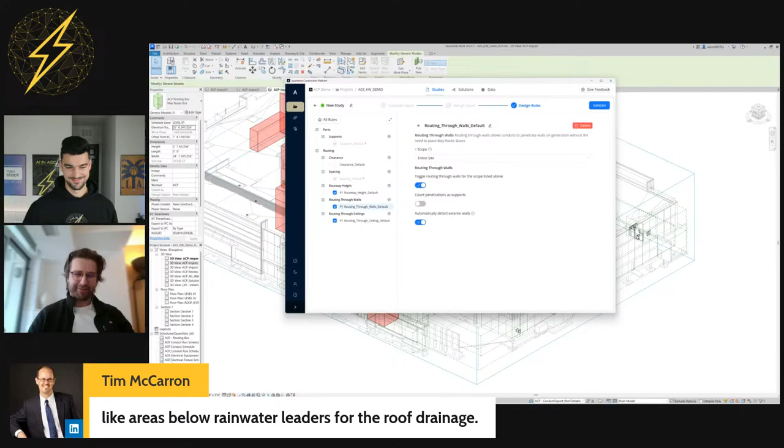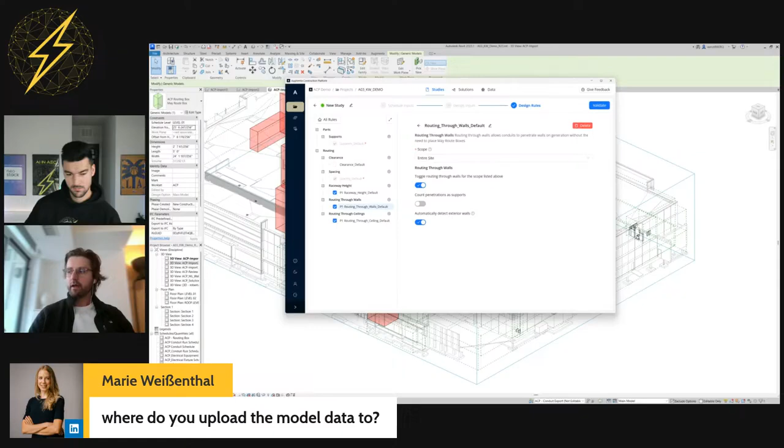And then, where do we upload the model data to? Depending on how you mean that question, what we do is we extract a limited subset of the site geometry. This is what we need to be able to run our system against. So we are not uploading the entire BIM model or the Revit model or anything like that. The data itself is hosted on AWS, entirely on US servers. Let me know if that is not what you meant with that question.

Can I just jump in with my question as well? Yeah. So many of these questions are very technical. What I'm mostly looking at is the process, because in the beginning you showed a presentation where you said it was hard to estimate, like 150 modeling hours, but it gets down to like 60%. But I don't know how big the project is, or whether that is a typical project, so I missed a bit of context.

Preparing is one thing, I understand that. You need to put the boxes, everything you explained right now. The generation is another thing that takes up a bit of time. But then the QA/QC part: is there a typical checklist that you would recommend? What should I be careful about, what should I watch for, what should I check? Because at first glance, when you look at the 3D, it looks very nice, it looks amazing. But what should I really pay attention to?

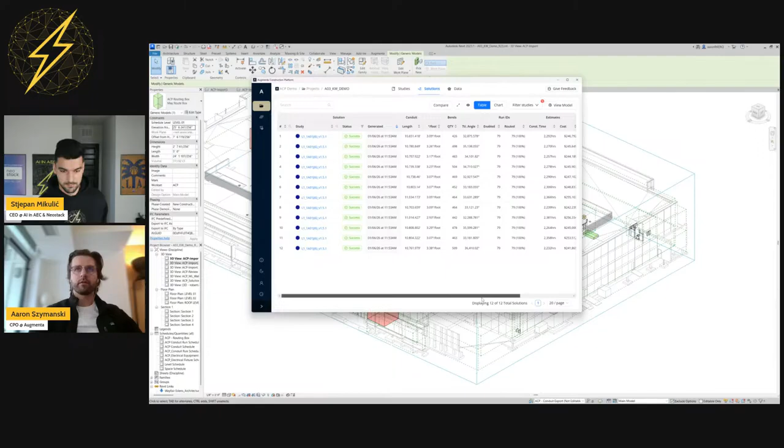Yeah, that's a good question. Let me keep that in mind once I go back to the solution itself, and we can talk through that, and what we're doing about it from a product perspective. So, going back to my list of studies. Let's imagine I hit validate; that button turns into generate. I hit generate. Let me load up a previous solution.

This one ran in 26 minutes. Let me jump right to the solutions. It's basically on the same setup. These are a number of solutions generated against that site input we just went through. This is the plot chart I talked about before. We can view those solutions in plot chart form, where we can compare estimated costs and construction time, or any other quantitative factors or evaluations of a given design.

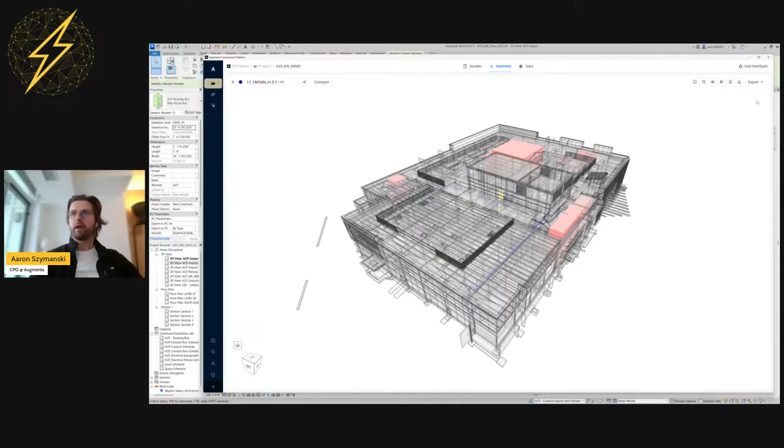And then otherwise, let me just open up one of these guys. I'll just go number one. It's going to load it into this viewer. Let me just make this bigger so that you guys can see what we're looking at. Okay, so here we've got a 3D view of the building, and I'll just hide the building so we can see the solution for a second.

So this is the solution that was generated. You can see here it's avoiding the keep out areas. It's drawn to those preferred pathways that we specified, and kind of zooming in, just touching again on the problems that it's solving. So we think of this as overall routing problems.

So finding the most efficient pathways from source to destination in a way that minimizes total degree of bend and total material cost, which is primarily driven by the length, but it's also driven by, for example, the size and quantity. So it's more expensive to have a lot of large conduit and introduce a lot of bends in large conduit than the smaller conduit.

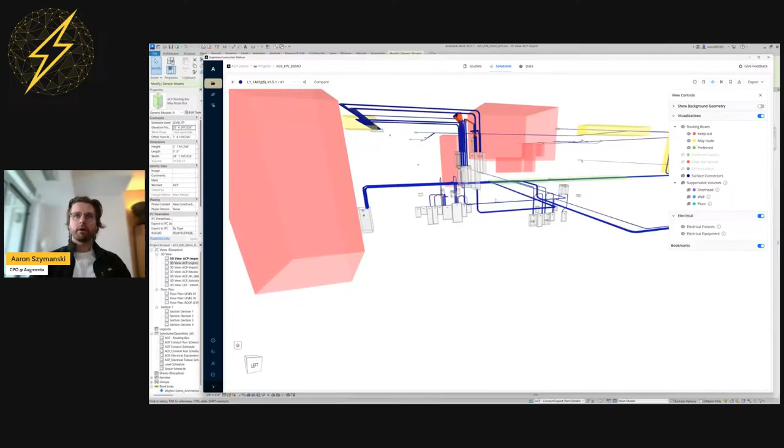We are hitting in to the top of the equipment. We can drop out to the bottom of equipment as well. But that's sort of the high level overview of the solution. Okay, so what we can do now, though, is start to talk about some of the details at a quality level. And there's a number of things that we're working on here.

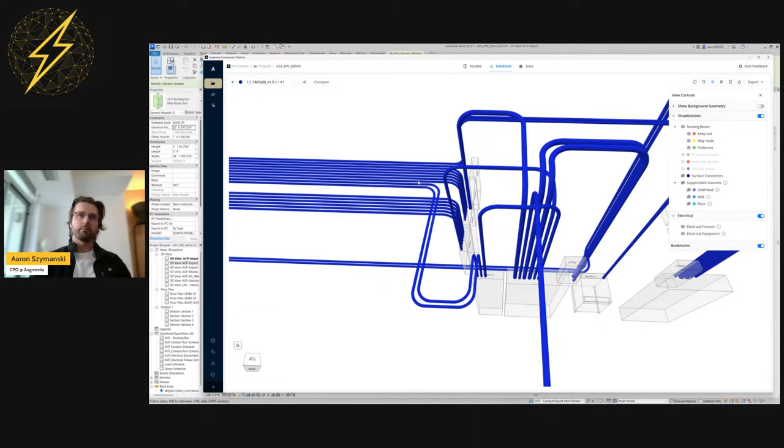So from a QA/QC perspective, let me see here. You'll see things like this, where this bend just doesn't make sense, right? It really should have gone out the front and merged into the rack there. Let's see what else. There's going to be areas where it'll still produce these slightly less than optimal decisions around, for example, how it's ordering on the panels. So we generally find that there are a lot of these localized things that you need to look at.

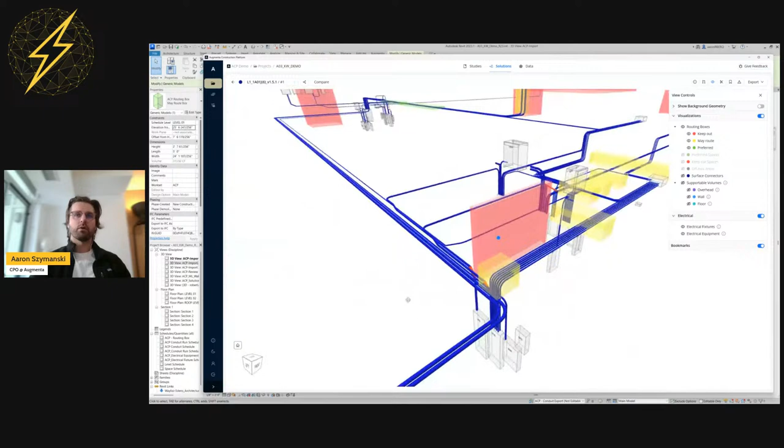Probably the way to think about it is that you're looking at it as if you had a junior modeler prepare this model for you, and you now need to go ahead and review it. And really, a lot of these things are what we're focused on improving, and the primary factor that has led to that rate of time savings improvement, or that productivity improvement, has just been a very concerted and systematic effort on the part of our engineering team to reduce these issues.

Here we see cases where, for some reason, ACP could not figure out how to place that bend, right? So we call these an unknown part. We know that there's a connection here. This doesn't look particularly complicated for a human being to solve, but there's just something about it where some constraint couldn't be met, and we couldn't quite figure out how to place that part.

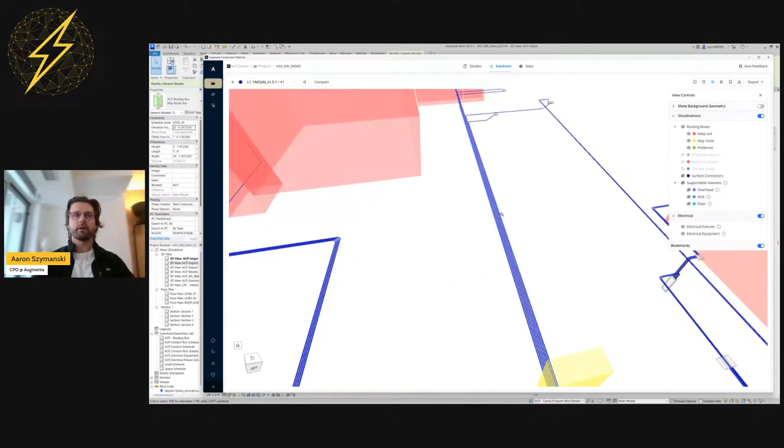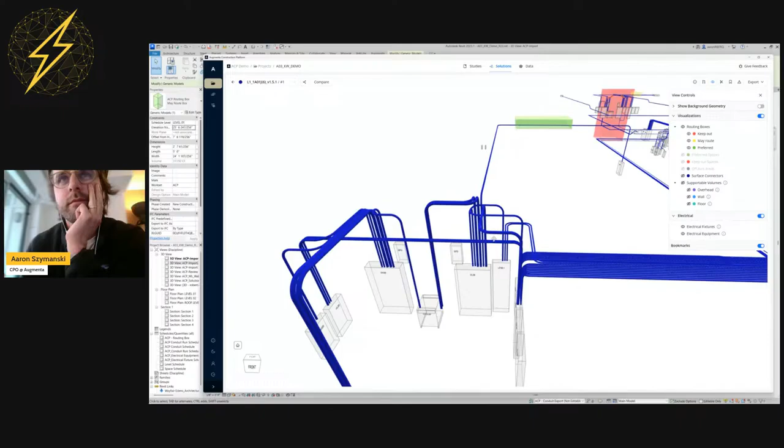The last thing that you'll see is, maybe I can find some here. Sometimes we get some self collisions as well, generally within racks. Let me see if I can find any. Maybe there's something here. Sort of funny to be going through a demo trying to find what's wrong, but we're very open about where the system is. Well, you'll have to trust me. Sometimes we do get self-collisions that you'll have to fix.

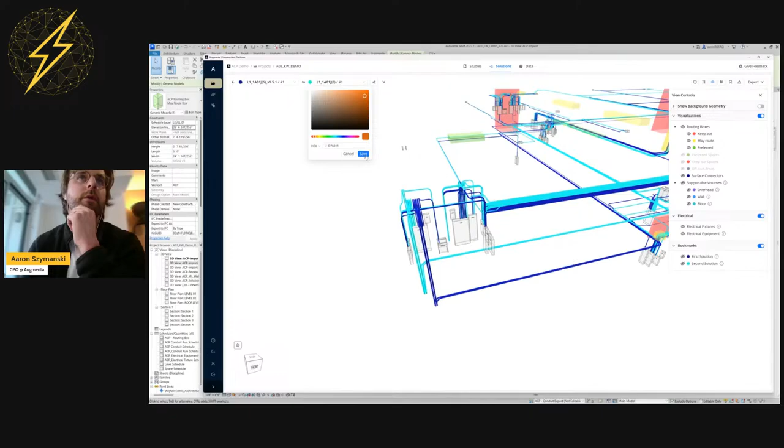So what we've done to help people do that is, at this point, we've got this analysis tool. Actually, before I jump into that, I just want to touch very quickly on being able to compare, because I think this is where it gets useful from a value engineering perspective. So I can load in solutions from other studies, and I can compare them against each other, right? So here we've got some very different pathways being selected.

So even within a generation, the system is exploring different ways of solving that problem. It's going to find different ways of optimizing for those different goals. So sometimes you'll have solutions that have less install time, but greater length because of the materials involved and so on. And where that's particularly useful is, okay, I've got a big coordination change. Let me evaluate the impact of that coordination change.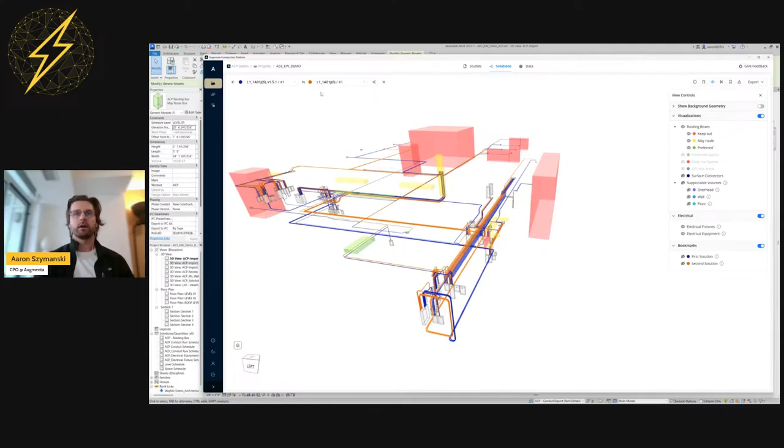What does that mean from a routing perspective, but also from a cost and time perspective? I'm at the engineering stage. I want to evaluate the impact of a potential design decision that I'm making. Where should that electrical room go? Where should the riser go? Those big sort of design decisions that today generally are made through intuition and expertise.

Now you can prove it to yourself with a lot more confidence just by running those different setups in parallel and then going in and comparing them against each other. So I can compare visually. I can also compare the statistics of those different solutions to really understand the impact of one over the other. We think that's really quite powerful.

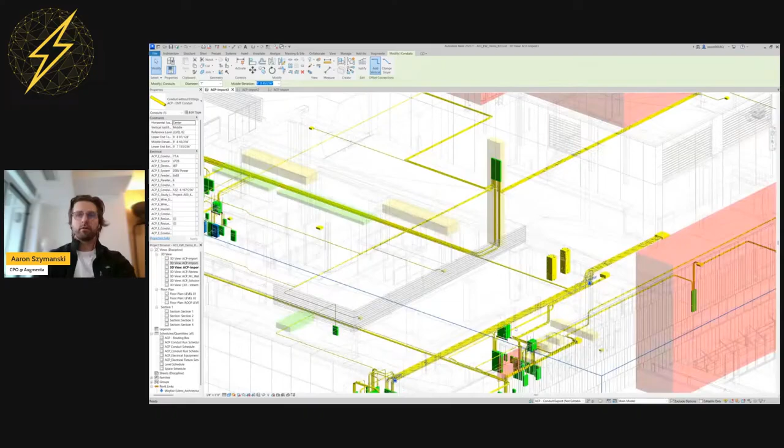So once I've, let's say, landed on that solution, I would go export to Revit, a system conduit. That will take a couple minutes, but the output will basically just look like what we saw here, right? So this is an outputted design out of ACP. So what we're doing here is we output in just a very generic, we use system conduit for the straight sticks, and we use a very, very generic conduit fitting for all the bends.

We have built a tool that allows you to convert all those parts to whatever you want. So if you are using Evolve, you're using BendWorks, you're using SysQue, you can just open this up and it will convert all of our parts to whatever part you want, and we just map, or you help it map the parameters that you want to map. And generally we can convert an entire site. Again, we've run entire data center sites in a couple minutes and got all those parts converted. So it's a really, really fast process.

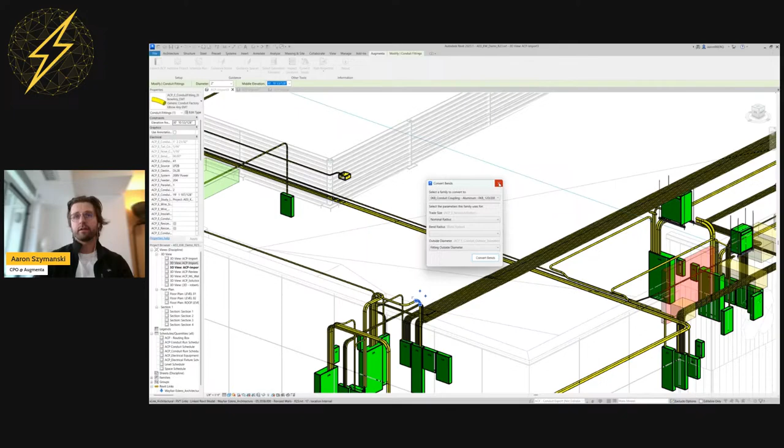And we've done that intentionally because we want to be very agnostic with the designs that we output. We know people use different systems. We are just trying to get that conduit populated for you. We're trying to get all that data into that conduit in a way that's useful for you. And then it's really up to you to use whatever workflow you want to go and do that final sort of assessment. But to aid with that assessment, we have built some tooling to help folks do that QA/QC.

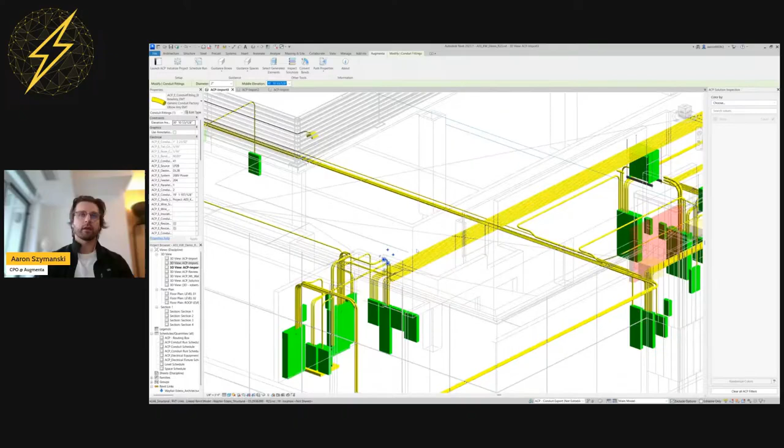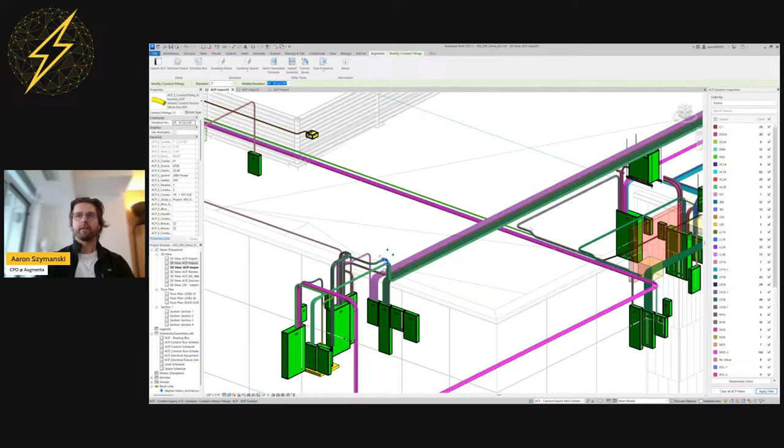So if I put myself in the shoes of someone using the system, I've just gone from 0 to 1. We would identify for you if something wasn't routed, so you know that everything that was in that schedule is being routed, but I still want to verify that, right? So we've built tooling here that allows you to visually analyze the output based on different parameters or different factors, right? So here I can color those sources and destinations by the source. So all the conduits leaving this panel are going to be this color and so on. And that really allows me to trace down those designs to make sure that everything is routing where I need it to. This is extremely useful in practice.

We can sort by destination. We can sort by, for example, system. I don't know how many systems are in this project. Okay, we've got a bunch of systems, so we can sort by system. And just in practice, the way this works is that folks will review the solution. They'll spend some time reviewing the solution, walking through each. Generally folks have a favorite of what they're going to filter by. So that could be, for example, by source. It could be by run ID. Those are kind of the most common.

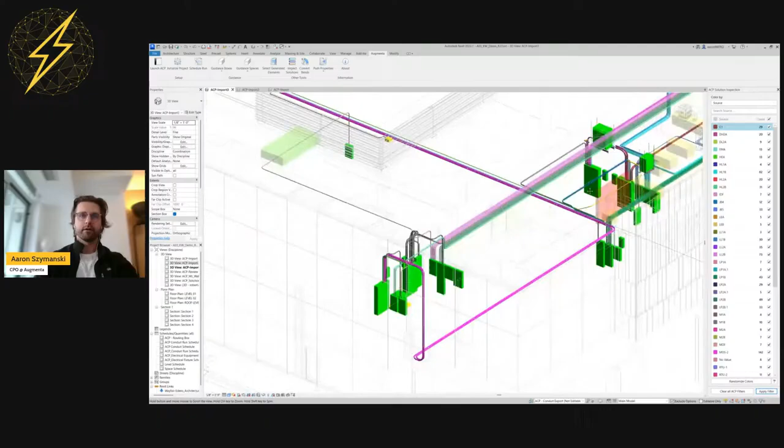We make it easy for people to isolate these. So they can go and isolate, and that's only going to show, there it is, the run that belongs to, for example, that source. Undo that. And even from an editing process. So this site is a little bit cleaner, but let's say I did have some of those. Okay, so maybe there are things here. Okay, here we go. Here's the self-collision. Oh no, it's not a self-collision.

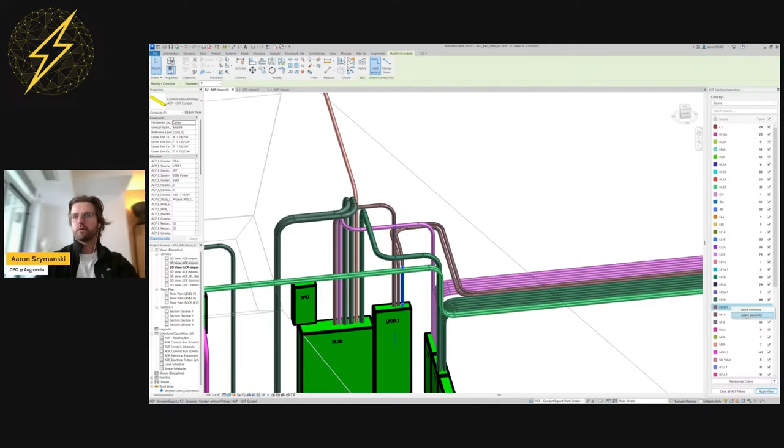Well, here's an issue that we saw before where we've got the bend sort of wrapping the long way around. So something I can do is really I can just focus down, just isolate the conduits that belong to this panel. That's L2P2B-1.1. Isolate by that, make those edits, unhide that, and go and look again at each individual rack. So in cases where people are doing that review, people have different methods. So you can do it by source.

A lot of folks will go by destination, and they're just checking, am I happy with the layout of these racks? Am I happy with, are in fact my parallel runs being run parallel with each other? So I think a lot of this is simply that even if we were producing perfect designs, there's always going to be some amount of time dedicated to that QA QC process, simply because you are going from 0 to 1. And that's going to increase linearly as the complexity of that project increases, because again, I've maybe gone from

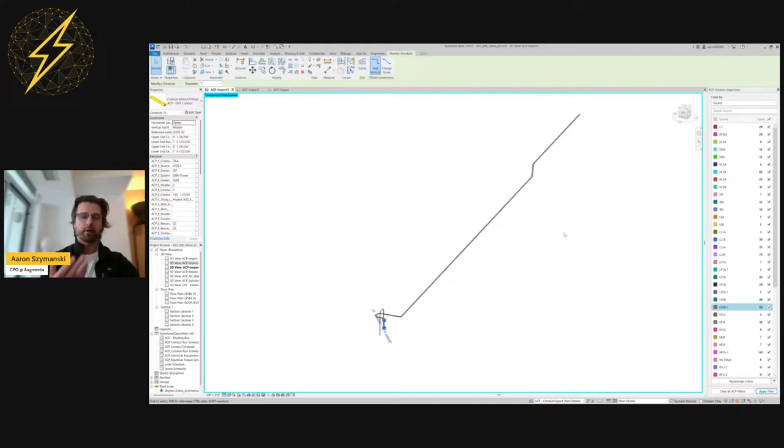nothing to 400 runs all in one shot. I'm seeing all of them for the first time. So we can guarantee that someone is going to want to work through each of those, verify that they're happy with it before it's something that they're comfortable bringing into coordination.

All right. So with that, let me go through a couple more questions.

All right, Tim. Can Augmenta recognize areas needed to keep electrical equipment and panels away from areas where plumbing passes above? The equipment itself. So we don't help with that. We don't currently help with anything around equipment placement. We really just handle the raceway itself. So ACP will avoid those systems, but we're not flagging for a user right now that, hey, you've put a panel under here, or the plumbing needs to move because it's running over there.

And that in some ways is related to your next question. Does it work with codes like the NEC and plumbing codes? So we did originally design the system with NEC in mind, right? We're not doing plumbing right now. So as we build up plumbing, it will be considering the plumbing codes and mechanical codes in general. From our perspective, right now we're solving primarily for routing and not so much for the actual engineering decisions.

We're not doing wire sizing. We're not quite doing grouping yet, though we are working on that. We are working on some of these factors, but right now, in terms of what's commercially available, it really is primarily focused on the routing and the coordination process. So we do have code-based considerations, for example, around supportability, but really the biggest controls are going to be those clearances that I mentioned. And those tend to be very project specific. So we're really relying on the customer to know what's right and what the requirements are for their particular project.

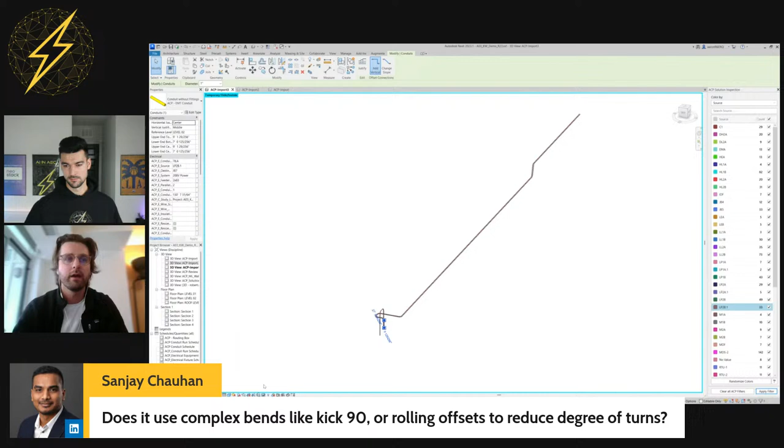Sanjay, do we use complex bends like kick 90s or rolling offsets to reduce degree of turns? We do. We do actually use some very complex bends. So we handle kick 90s. We do occasionally use rolling offsets, though we try to avoid them. I can see if I can find any here. Let me see here.

If I could have loaded up a more complex project for you guys, like a data center, which I unfortunately can't do for confidentiality reasons, I think we'd see more of those complex bends. But of course, it's going to try and use simple bends. It's going to try and use standard angles wherever it can. But let me see here. In short, we do handle those, and we have a hierarchy where we try and handle it with the simplest solution possible, but in cases where that's not sufficient, we will resort to more complex bends and kicks and offsets.

And then Marie, would you be able to use it completely on your own, or is it safer to use Augmenta with support from you? So we don't really have an option right now to use it on your own in the sense of hosting it locally, if that's what you meant from a technical perspective. But if you mean from an end user perspective, this is built for you to use, right? So we're not a BIM consultancy. We are a software builder. All of our customers are driving it themselves.

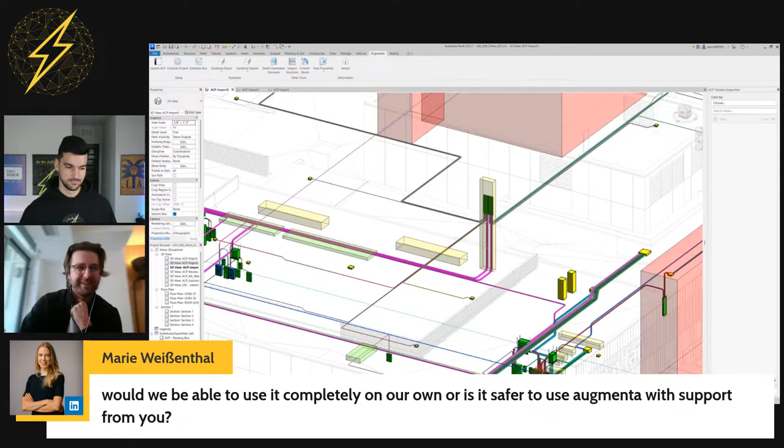So from a technical perspective, there's no current model for on-prem hosting. So it's all going to be cloud-based and running off of our servers. Let me know if that wasn't quite answering your question.

Okay, awesome, Aaron. You covered a lot. Do you still have anything to go through? We covered a lot. I think we kind of hit all the key points. No, I think that's about it. I think we've covered enough that everyone should have a general idea of what it can and can't do. And of course, happy to answer any other questions that you guys have.

Okay, I have a question, and this is probably a tough one, because most people that I believe are watching aren't using Augmenta yet. That's why they're here. They want to learn about it. And we had Endra on the show a few months ago, and everybody heard about Consigli, but they got bought out. Okay, sure. So you can't even access it anymore, probably, at this point.

Yeah. So how do you handle this question of what app to choose if you're interested in getting all of this? MEP is everybody's dream, right? The whole MEP. But right now, you're doing electrical and they're doing fire, but they're moving to electrical. So how do you approach this question of competition? Why should somebody go with you and not with your competitors?

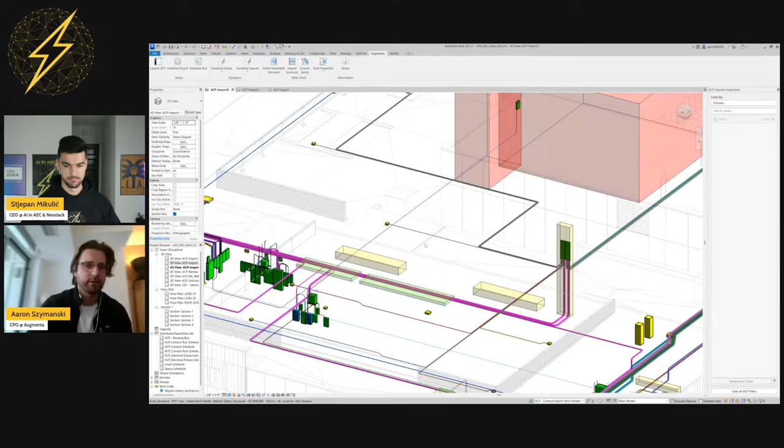All right. We have a couple of questions. Again, Marie and Tim, thank you for being so active. You guys are awesome.

In Germany, contractors are in such high demand they don't care about working with superior software. They just do as they always did. How's your experience of subcontractors in Canada and the US? It pains me to say this as a Canadian, but the Canadian experience feels similar to your German experience, whereas it's less so in the US.

In the US, we found that there's a very high rate of BIM adoption and generally a lot of interest in new software. A big driver for that is the labor shortage. Even though contractors are in high demand, there are a lot of projects, and the capacity to deliver on them is not matched by the size of the teams. Everyone's trying to hire BIM modelers, no one can find them, they're very expensive, and everyone's outsourcing more and more. So there's a lot of internal pressure to innovate.

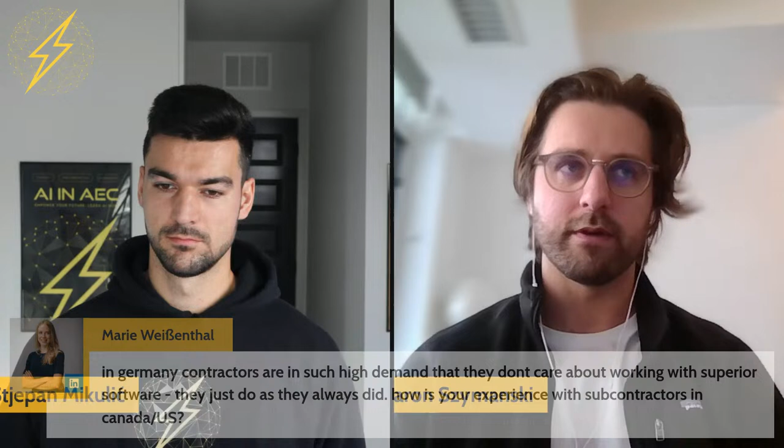In Canada, it feels a little bit quieter. Firms here are just not so far along in terms of BIM and technology adoption. Again, it pains me to say that. So I imagine it's a similar dynamic in Germany. This is going off track, but I think a big driver for BIM adoption in the US was the 2008 crisis. We were hit by that here, but not as much, for a multitude of reasons, and there was less pressure for firms to innovate or die the way there was in the US. In retrospect, that was a healthy push for that industry.

Tim asks, can a smaller contractor use this, or does he need to be sophisticated with full in-house Revit capability? We definitely have small contractors using this, as small as 1 or 2 modelers, but you do need a modeler. It integrates in Revit, so some basic level of Revit knowledge is required. You need to be working in 3D. You probably want to be working on projects where the other trades are also coordinating, so you're actually getting something to coordinate around.

Though we've had folks use this on projects where they would only coordinate around the engineer models for the other trades, and because they could get their stuff modeled so quickly, they could get it fabbed and get design sign off, so they could beat the other trades, which they weren't able to do before. But fundamentally, there is a baseline level of sophistication, which isn't very high, but you do need to have Revit in-house and know how to use it.

If not, we do work with third parties. Third parties are very much a target user of something like this as well. So if you don't do that in-house, we can certainly work with your third party, and they can use this to get you that same benefit faster.